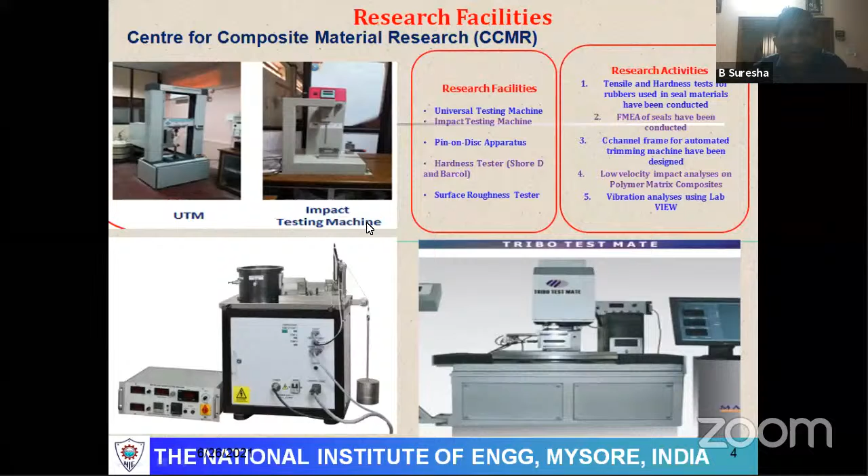So what I did was survey where these facilities are available, and also met professors at IISc and also IIT Chennai, and to some extent IIT Delhi, where leading researchers worked for more than a decade in the area of tribology. One is Madam Jayashree Bijwe from IIT Delhi, and then in Central Power Research, Dr. Sitaramu and also Sampathkumaran, and from Indian Institute of Science, Surappa, and also Professor Kishore. They are into polymer based composites. Maybe because of those contacts, and also going through what facilities they had available.

When I took up my coursework at PSG College of Technology, I thought I should contribute more towards the research society, so that it is beneficial not only for researchers but also for the students of the National Institute of Engineering. During the coursework, I wrote a project for DRDO, that is the Aeronautics ARDB project.

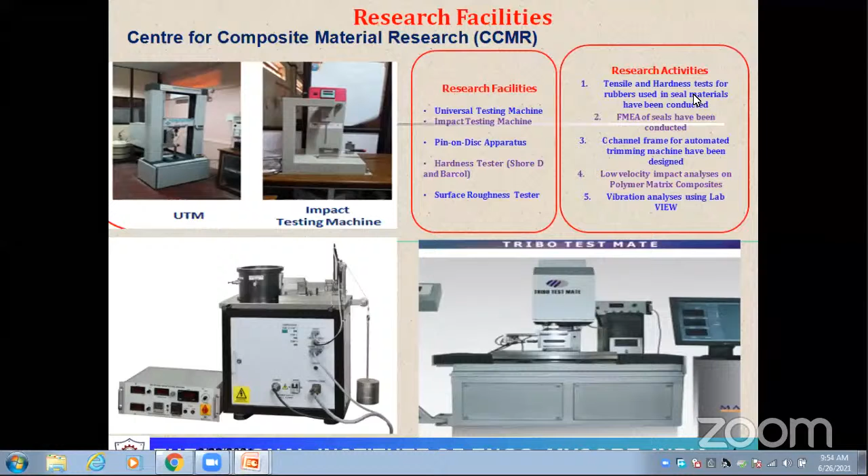Instead of dry silica sand, which is made to flow through gravity using a hopper so you can control the flow of abrasives per minute, the same abrasive particles of different size can be made into a slurry with water, and that wet type abrasion test can also be carried out. Similarly, for erosion, instead of dry sand, you can make use of slurry erosion testing, wherein slurry is used as abrasive.

Coming to two-body abrasion, any abrasive wear can be classified into two types: two-body abrasion and three-body abrasion. Usually two-body abrasion occurs in material removal from a cutting tool for bar stock, using a lathe for example. Whereas for bearings, you have a sleeve, around that you have lubricant, and then a rotating member made of very high strength material, steel.

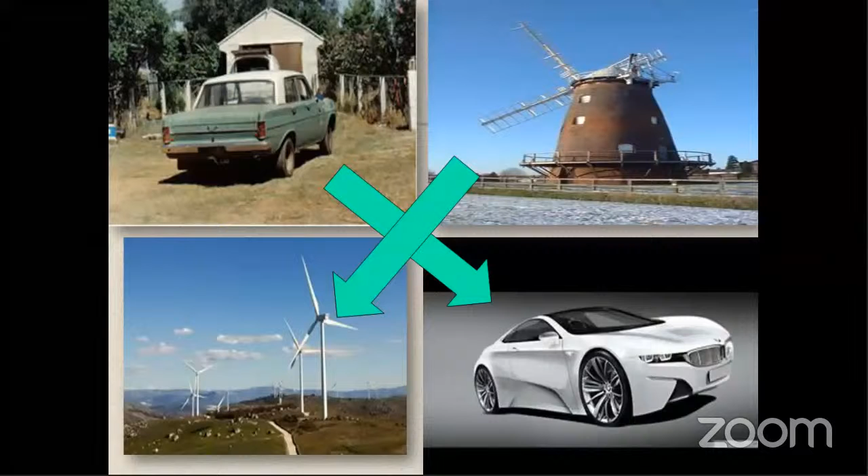So coming to this slide, why I showed these images here is you can understand a lot from these four figures. If you look at old technology or the development of materials in almost the 20th century, you can see these transportation or automotive vehicles, and the whole structure or assembly of a four-wheeler. From that photograph you can understand the performance, the materials used for the assembly, and also the aesthetic aspects.

In addition, the corrosion aspects of these conventional materials, and also the total weight. Because of material science advancement, and whatever technology we have today for fabrication of not only conventional materials but also man-made materials, and the usage of computers or software,

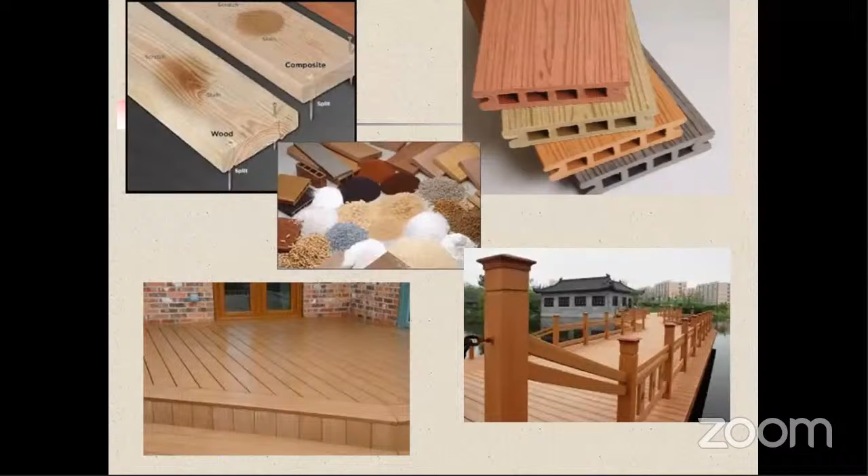So why only in transportation or in the power sector? Why not even in structural applications also? You can think of using what are called waste materials. Whenever you go for cutting different woods, you will have a lot of waste. Why can't you make use of that sawdust and develop the waste materials into products for various

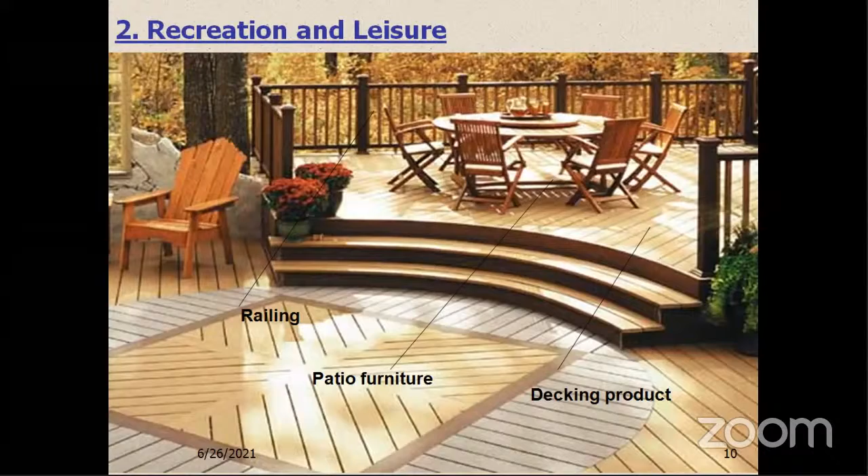And one more utilization of this waste is given in this figure. And also some of the sandwich composites and waste materials, wherein you can access insulated materials. Nowadays a lot of research is going on related to soundproofing, especially in auditoriums, using man-made materials, wherein you utilize natural fiber with very lightweight and foam type structures for roof soundproofing applications.

So the benefit of composites is not in one direction or for a particular application, it is multi-directional. If you make use of polymer-based composites, you need not go for painting of those parts. You can think of a natural colorant, and during fabrication itself you can add those pigments and develop the products. And the density is very, very low.

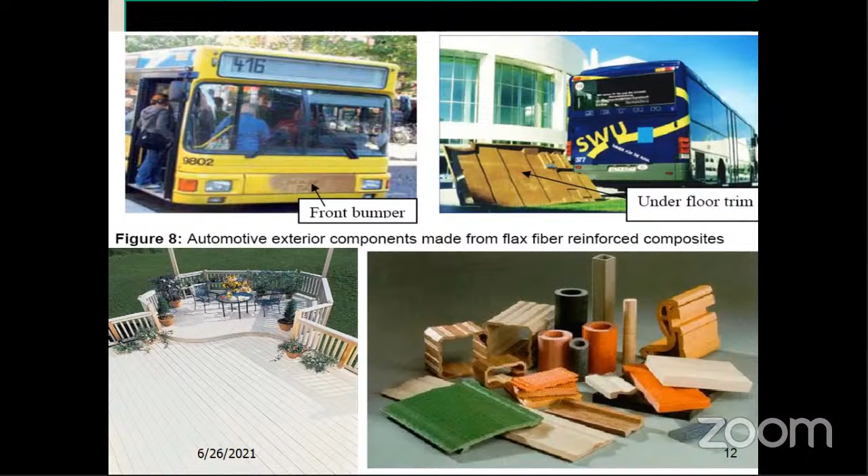Because of that, the performance of the composite compared to any conventional, high density material is better; here the benefit is a very high strength to weight ratio. That is an added advantage when you think of polymer and lightweight metal based composites for end applications. Some more applications of composites are shown in this figure.

So not only in those fields, but using natural fiber reinforced composites, the post office box, helmets and roofing of parking areas, where economically you can build structures using these waste materials converted into composites, and lightweight also.

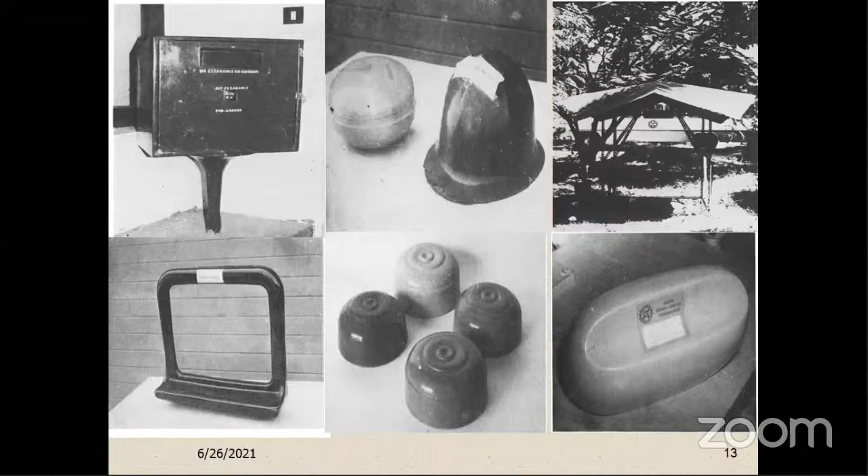Even automotive applications, in transport vehicles or even in chairs and other moving equipment, you can think of these polymer based or polymer filled with metals for bearings, rollers, etc. We can already effectively utilize these composites for these applications.

Because of industry 4.0, if you look at that framework, we have digitized technology, digital printing, or 3D printing of both polymer based composites as well as metal based materials. Because of the technology we have today, with minimum waste you can develop these materials to very high accuracy and good surface finish.

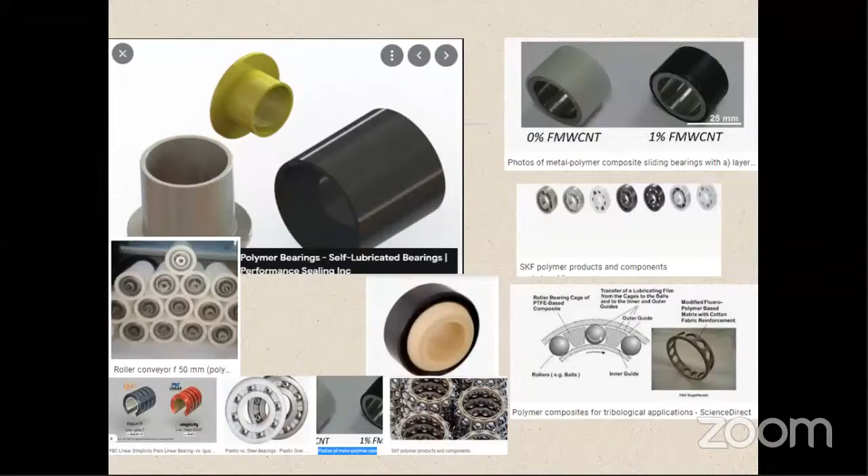Some more figures, this polymer bearing technology from SKF. These are ball bearings, single row or double row. Except the balls, rollers or needles, almost all other parts of the anti-friction bearings, the inner race, outer race, and cage, are made of polymeric composites rather than conventional material.

Because of this advancement, performance-wise it is far better than the earlier bearings we used for various applications, and also has long life.

So those are all the advantages. And when you make use of these polymers as one of the ingredients to develop products, the best advantage you have is, one, it is lightweight. In addition, it is corrosion resistant. And further, when you think of this reduction of coefficient of friction, that is very much essential so that you can reduce power loss due to friction in various machinery.

So in that direction, the polymer is the best material, wherein it acts as a continuous phase in the composite. So polytetrafluoroethylene, polyether ether ketone, epoxy, and also polyester, etc. are effectively used in the development of bearing products so that you can reduce friction and also increase the wear resistance. Those are the benefits.

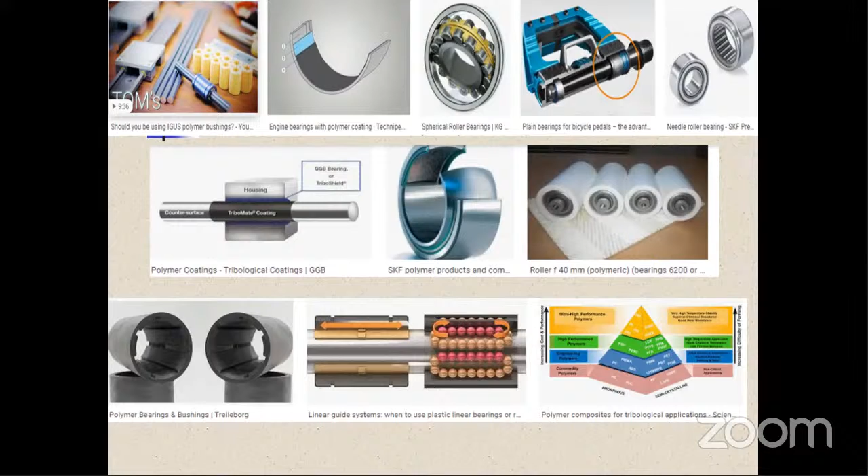And because of these newer advanced materials for the development of bearings, you can think of the cost reduction in these products because of large usage, as you can see in the present scenario. So some more components wherein polymeric materials with various strengthening materials or agents are used to develop the composite materials. So some more figures: it is a needle bearing,

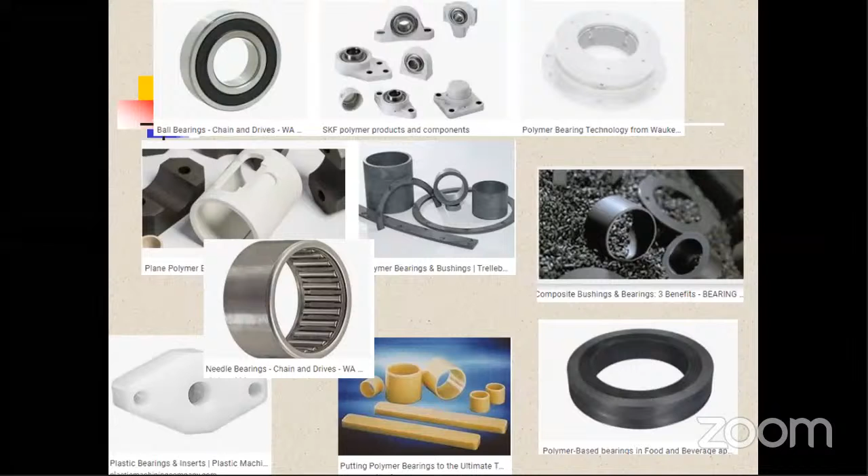and some figures here, sleeves, and also what are called the washers, or sealing parts. And also you can see some cylindrical sleeve with contours and other things, without much wastage, thanks to this advanced manufacturing technology we have. So with minimum waste you can produce the final product in one shot. No secondary machining operations are involved when you go for development of these complicated shapes.

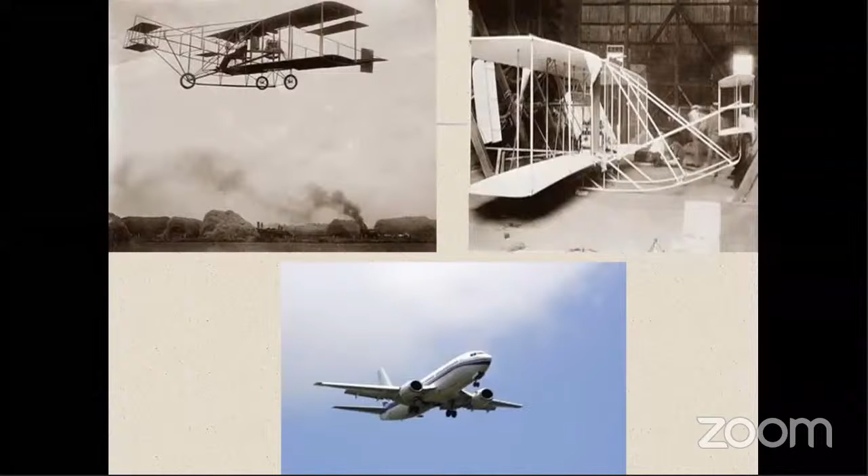So knowing those various applications of these newer materials because of the newer manufacturing methods, I will just go through this overview of what a composite material is. If you refer to the examples I showed, many engineering applications require unusual combinations of properties. Those properties you cannot get by selecting a conventional material. For example, in aerospace, underwater, or even transportation, you cannot achieve it with a single material, because any aerospace component should be very strong, stiff, lightweight, and also abrasion resistant.

But when you think of a material that is very strong and stiff, such materials are available with higher density, and also the space occupied is more. So you can think of some conventional materials. But if you go by lightweight materials and improve the properties so that they are man-made and also abrasion resistant, those are materials which are not readily available as single or homogeneous materials. So in those situations, you need to go for the development of newer materials, what we call man-made materials, or simply a composite material.

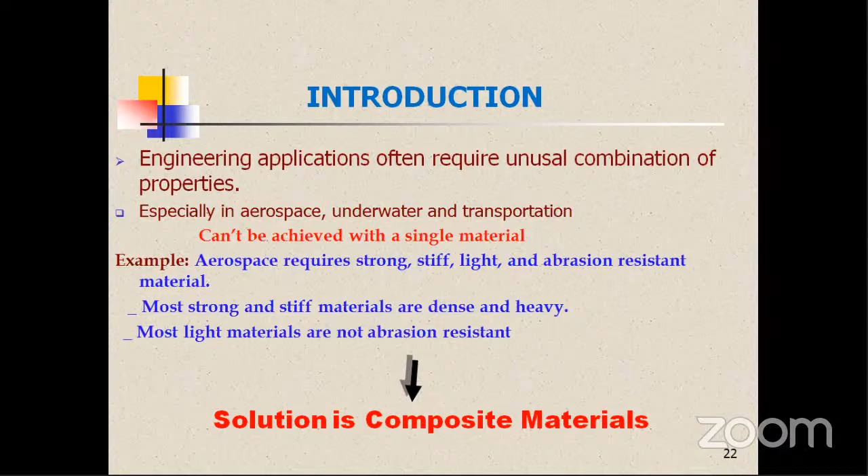So just for a layman, you can understand how composites can be fabricated. Here you can see I have this mat type structure, the carbon fiber fabric. So these fabrics of different layers, depending on how much thickness you need, with epoxy and hardener, you can lay up and produce carbon fiber reinforced epoxy composites. In composite terminology we call them laminates. So depending on the orientation of the fibers, you can think of how the directional properties can be improved.

So nowadays we have smart materials, then we have functionally graded materials, because of these ingredients and also different materials available with various fabrication facilities. It is possible to go for effective design and fabrication so that minimum material waste is taken care of by using these various materials available in nature or even in the developed form.

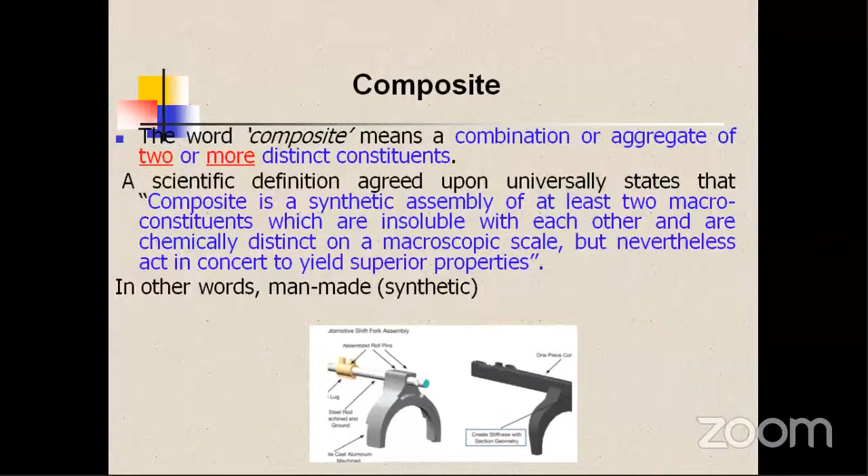So in this direction, when you go for more than two constituents to develop a composite, you can call that composite an advanced composite, or a multi-phase composite or hybrid composite. So with that, I have already given what is matrix and what is reinforcement. The matrix holds them in place. That is why it should be continuous, with the discontinuous phase being the reinforcement.

So the majority of thermoplastic materials are available in granule form, and you know the fundamental difference between thermoset and thermoplastic. So you need some device to heat these granules so that they will be in a melt state. In that stage, you have to add reinforcement and mix very well so that dispersion is more uniform. That discontinuous phase may be fibers or fillers, and finally you can make use of molds similar to hot chamber die casting or cold chamber die casting to produce various parts.

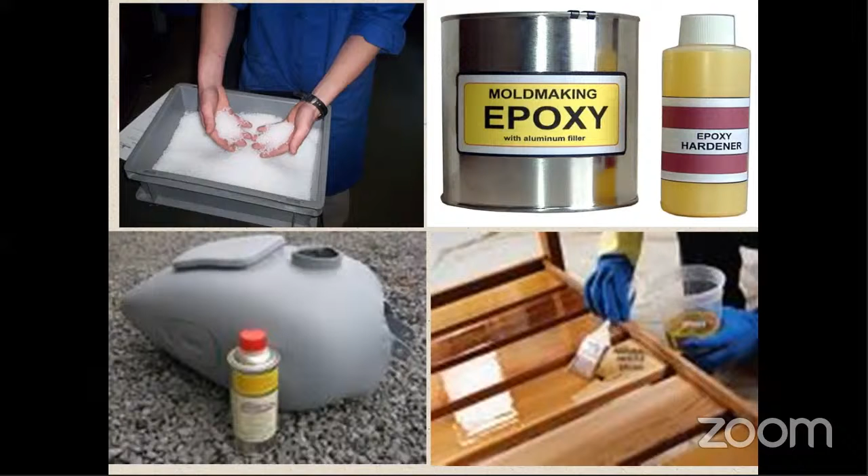Whereas that is not so in the case of thermoset composites. As I said, polymerization is required for thermoset materials like epoxy, vinyl ester, or polyester. So if you make a little effort with some basic textbooks, you can easily go for development of either thermoplastic or thermoset based composites.

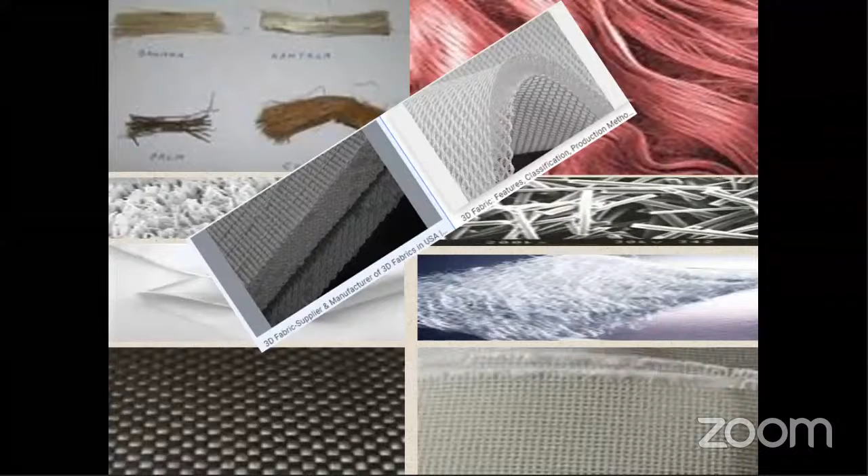So there are various fibers, starting from natural fibers up to synthetic fibers. Nowadays, in some applications where you need to strengthen the materials in the Z direction rather than X and Y, instead of selecting 2D fabric, you can also think of 3D fabric, three-dimensional fabric, as effective reinforcement to develop various composites.

So why only synthetic fibers? You can think of this coconut tree. You take any part of it, it has what is called cellulosic material, what we call natural fibers. Why can't you make use of this readily available material? Some surface treatment is required so that you remove unwanted material like pectin from the fibrous material, and make use of these bio-friendly materials as effective reinforcement to produce biocomposites for various applications.

So a lot of research work is also going on with respect to this, in Brazil and also Malaysia. These countries are thinking of replacing almost all synthetic composites with bio-based composites, and they are even encouraging farmers to grow fibrous plants or trees, and the government is supporting farmers to grow these naturally available trees or plants, and finally make use of those fibrous materials for development of products for various applications, especially for transport.

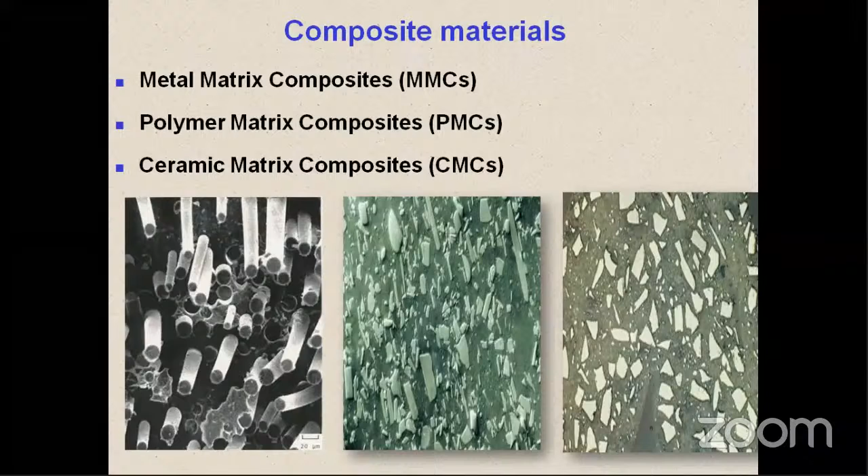TEM especially is very costly, so it is usually a facility for characterization of nanomaterials rather than micro composites. As I said, in some cases, as a designer, you have already selected materials, but sometimes you will end up with a bonding or adhesion problem with the other constituents during fabrication. In such cases, you can think of additives like plasticizers, fillers, stabilizers, flame retardants, coolants, colorants, pigments, etc. to modify the properties of either the matrix material or the reinforcement material.

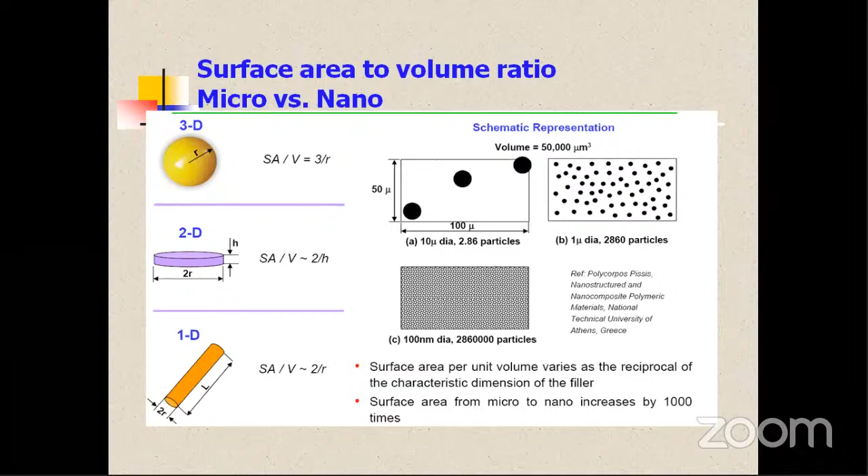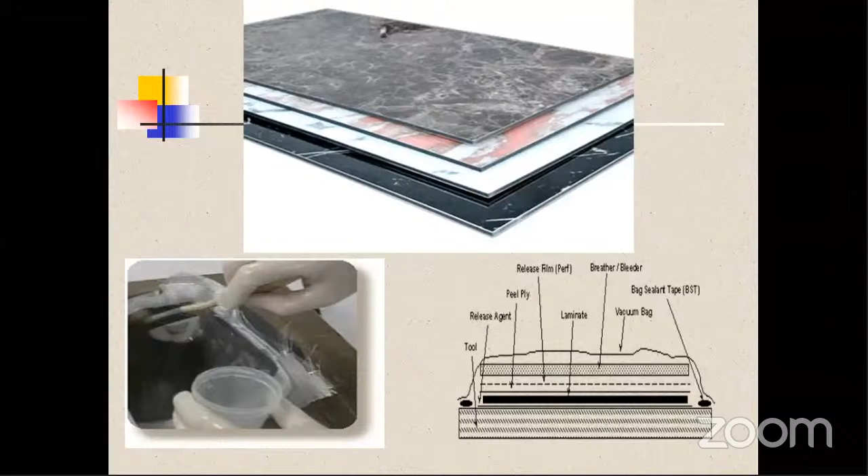Then coming to polymer matrix composites, you can think of thermoset or thermoplastic polymers, with majority synthetic polymers, carbon fiber, glass fiber, aramid fiber, basalt fiber, boron fiber, etc.

What are the benefits instead of metals or ceramics as the base material or continuous material? If you select a polymer as the matrix with various organic or inorganic fillers, in fiber form or particulate form, benefits include high strength to weight ratio, lightweight, fire resistance, good electrical and chemical properties, weathering resistance, and color - any pigment can be used to get natural colors.

Maybe because of this, in wood-based composites, you can see even teak structure can be obtained from man-made doors or frames, even window frames, etc. That is the technology available today.

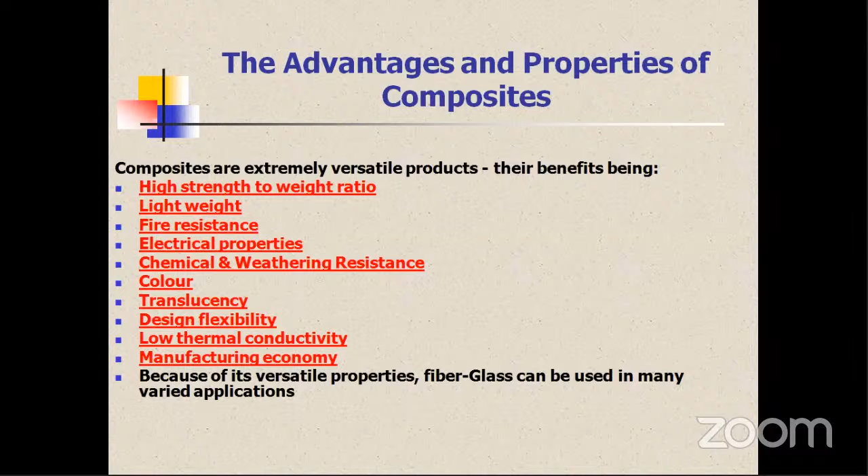Translucency, design flexibility, thermal conductivity is low for these components, then manufacturing economy - if you go for mass production, you definitely lower the cost for the product you develop. So when you think of development of polymeric composites, it is for enhancement of mechanical properties.

You should be very careful about what design considerations to account for when selecting fibrous reinforcement. First, you should know the type of fiber reinforcement, whether carbon fiber or glass fiber, and what percentage or volume of fiber. That is very important - you cannot go for 100%.

It should be, as I said earlier, 60% maybe maximum if you use hand layup, or you can think of pultrusion or filament winding, where up to 80% fiber you can impregnate with the polymer for development of the products.

As I suggested in classical lamination theory, for the laminates you develop, especially fabric reinforced composites, orientation of fiber is very important. You can orient all fibers in the X direction or Y direction, or orient from 0 to 90 or 90 to 0, that combination.

And what type of resin - is it having good inherent properties, an effective matrix material for the reinforcement you selected? You should not unnecessarily make use of very high strength material if the design requirements don't need it. So you should think of the type of fiber and type of resin so you can have control over the cost of the product you develop.

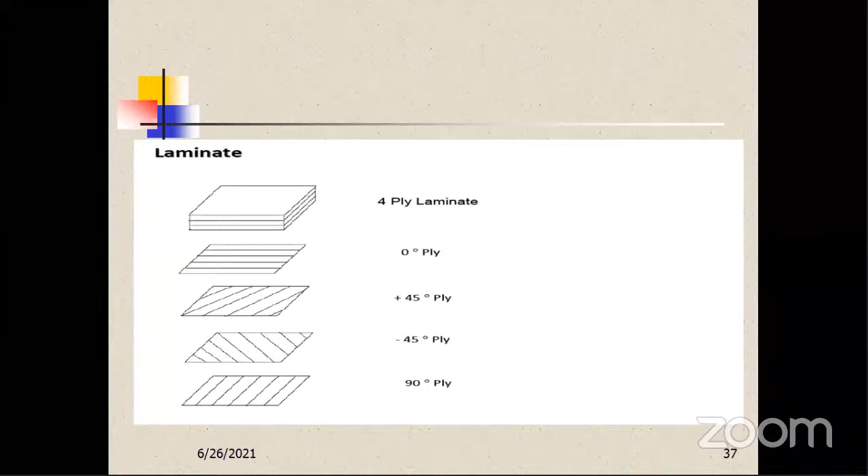As I said, in classical lamination theory, orientation of each fiber is very important, as shown in the schematic diagram with different layers. So in a composite, based on the bending properties required for the laminate, you can think of various architectures of fibers, so the stacking sequence differs.

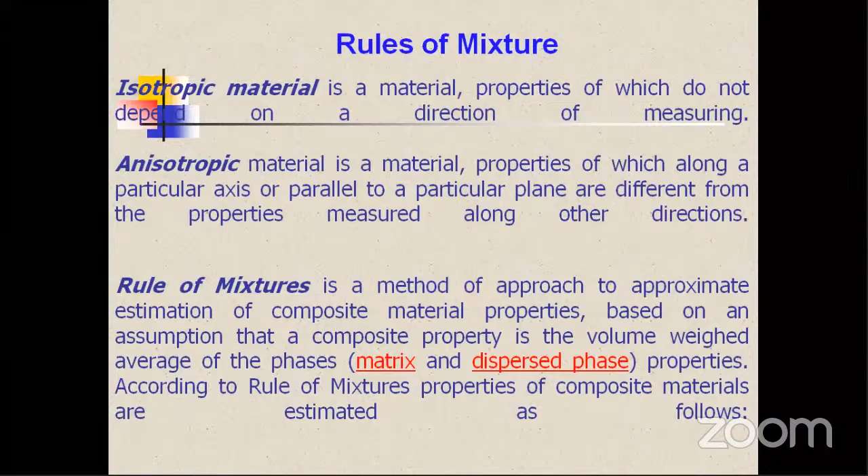You can estimate the development of composites before going for fabrication. Any composite materials chapter will give the rule of mixture, so that you can study ideal properties of the reinforcement and matrix selected. You can estimate strength, density, thermal properties, and electrical properties, based on models developed by different researchers.

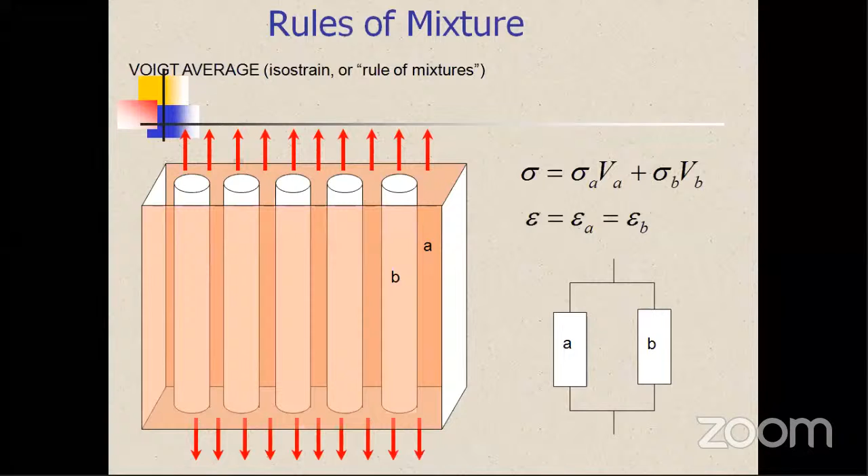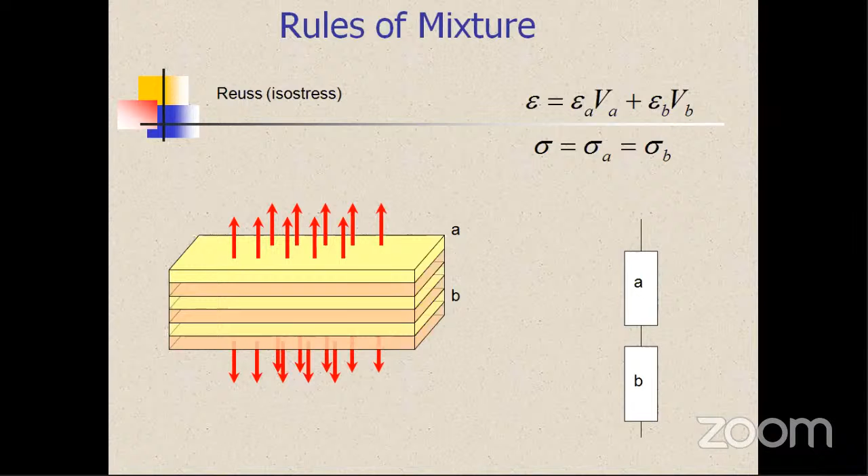Depending on fiber orientation, the stress induced and strain can be the same, or in another model, stress is constant and strain is varying, depending on whether fiber orientation is in the x or y direction and loading differs. This is the difference between the Reuss model and the Voigt model, and how modulus varies with weight percentage of reinforcement.

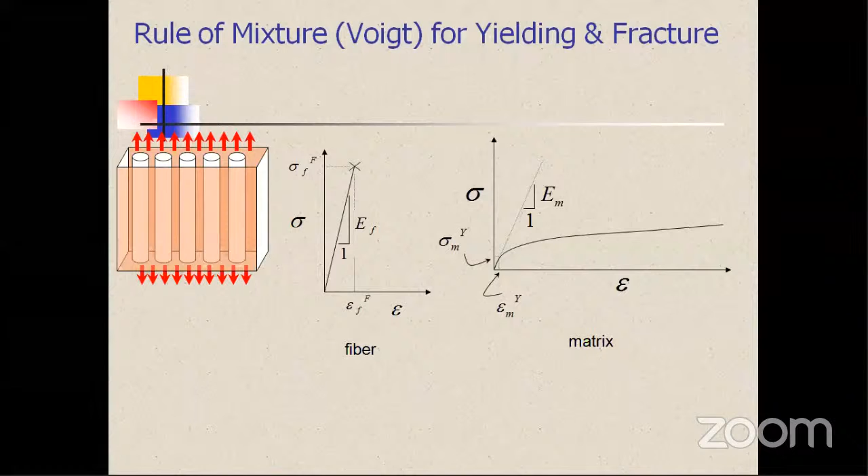For the matrix and reinforcement materials, the reinforcement generally has very high strength but lower strain, whereas epoxy or any matrix material has better ductility rather than strength. Superimposing these gives combined properties, since it is not a homogeneous material but a heterogeneous one.

Other properties like shear modulus, Poisson's ratio, and thermal expansion can also be modeled and estimated. Only after that should you go for procurement of materials from the best suppliers, because in the market people may cheat when money is involved. So make a thorough survey to get good confidence for the development of research work.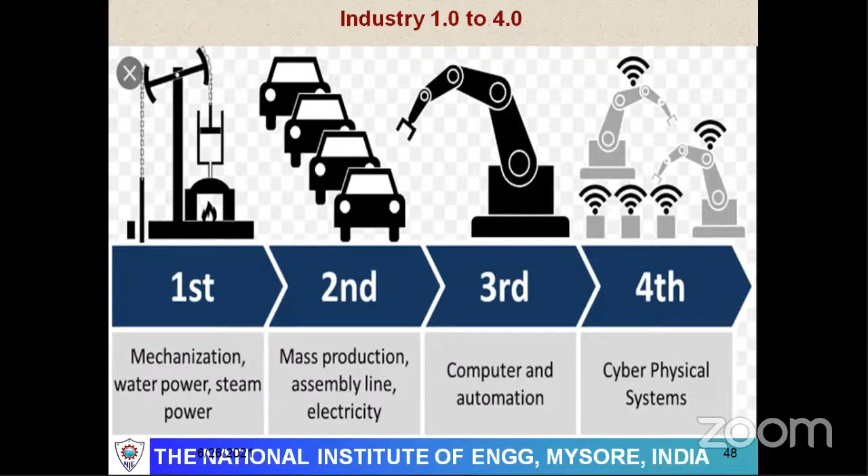Now we have cyber-physical systems, where this framework consists of the Internet of Things, smart sensors, advanced robots, and big data analytics. Among these, 3D printing is a very important technology for manufacturing. If we use 3D printing, also called rapid prototyping or 3D additive manufacturing, for the development of composites—especially polymer composites—we can study how those polymer composites perform, which I will go through from these slides onward.

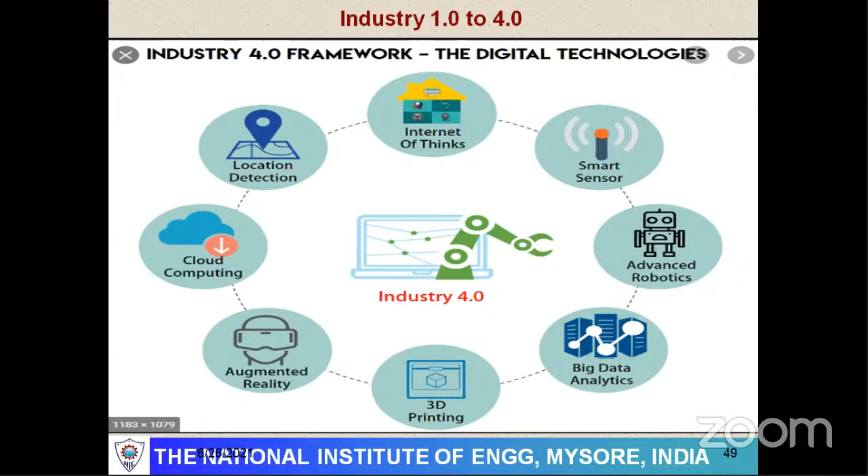Some complicated components made of polymeric-based composites are developed using 3D printing. Even a multi-cylinder block for automotive vehicles can be produced in one shot using a CAD model with an STL file, reproduced using selected raw materials with a proper 3D printer.

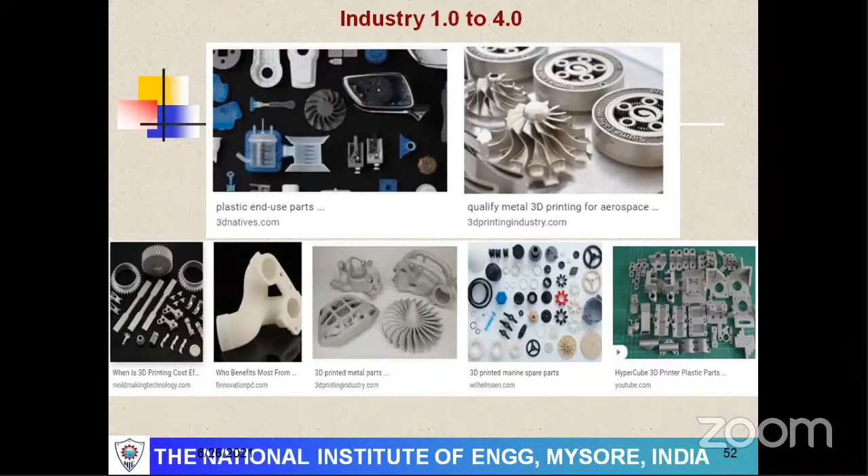Given the technology available today, why not make use of this advanced technology for mass production, so the cost per product can be reduced? Some components that are very thin and also very complex can easily be produced by means of 3D printing.

So what are the benefits of 3D printing? It enables cheap manufacturing through mass production, quick production, less waste, accessibility, sustainability, and new shapes and structures. These are the benefits of 3D printing.

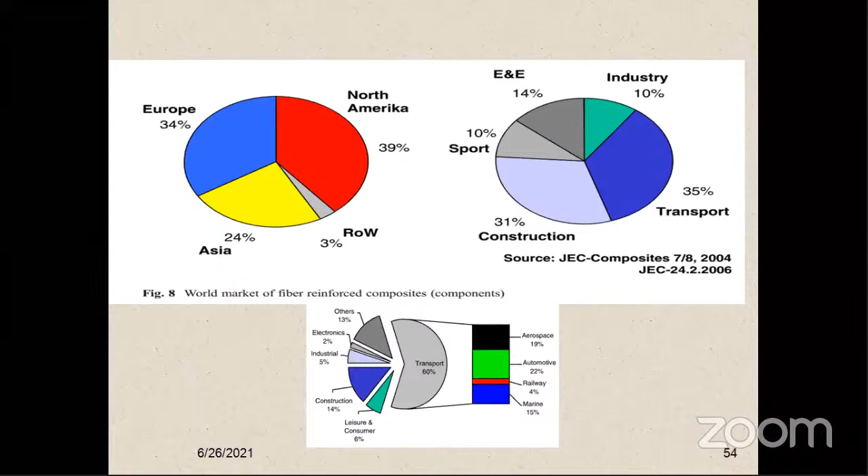Coming to 3D printing applications in various sectors, I will not go through these in depth. The usage of composites with 3D printing worldwide: one company called JEC Composite develops components for transport at 35%, industry at 10%, electrical and electronics at 14%, sporting goods at 10%, and the major share goes to construction-related industries at 31%. This is where composites can be manufactured.

I will not go through this in detail, but the methods include sheet molding, injection molding, resin transfer molding, pre-preg, pultrusion, filament winding, and thermal forming.

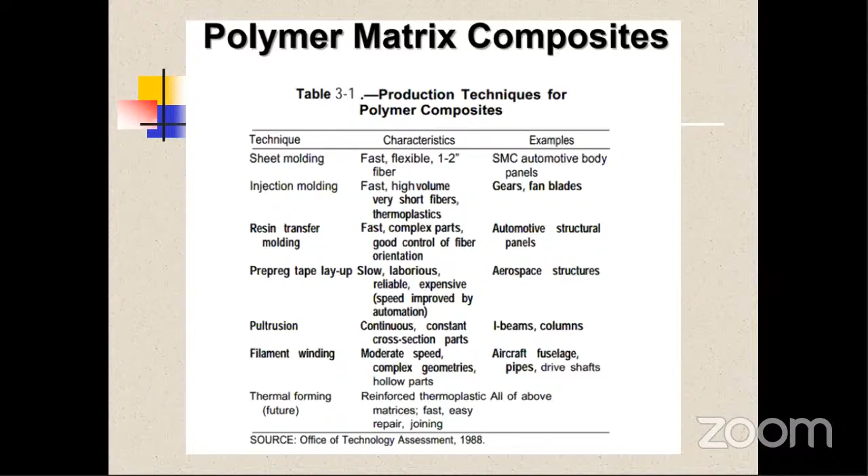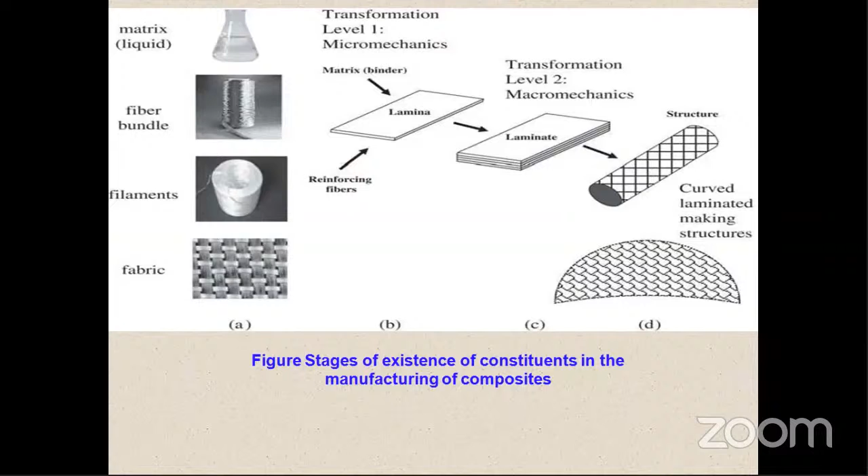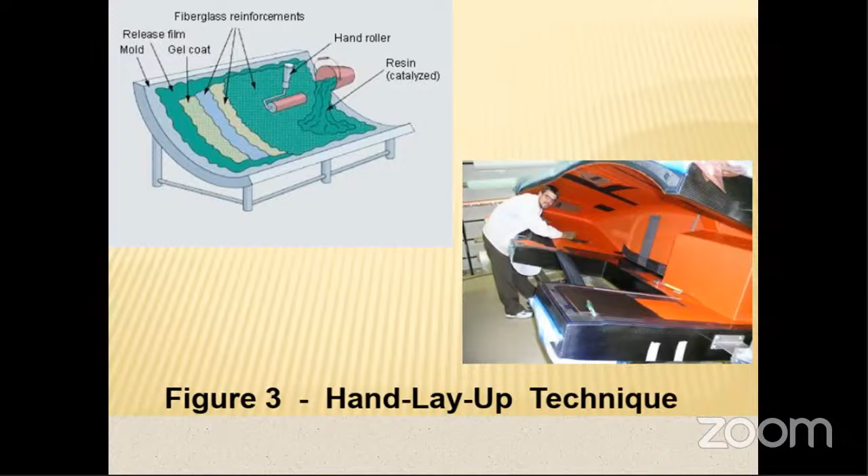Coming to the simple hand layup technique, this is more useful for researchers. Hand layup for a product, how you can take it up with the mold available.

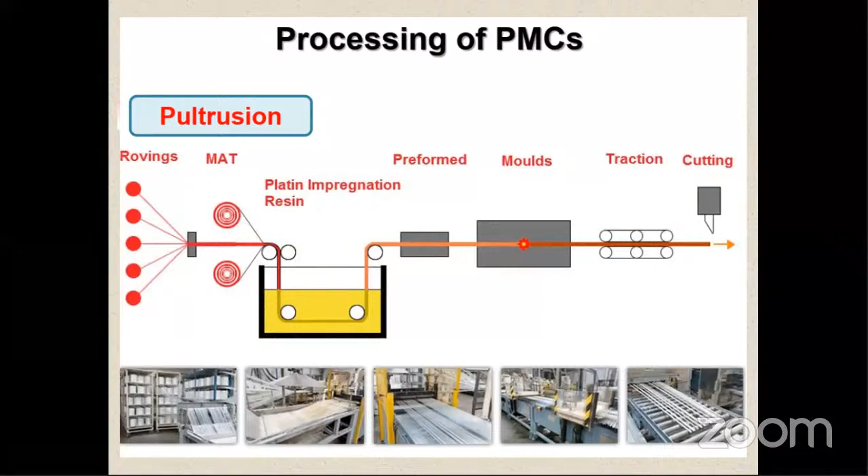Some of the figures are shown here, and various complicated sections of different types can be produced using this pultrusion technique. Then you have this, what is called resin transfer molding.

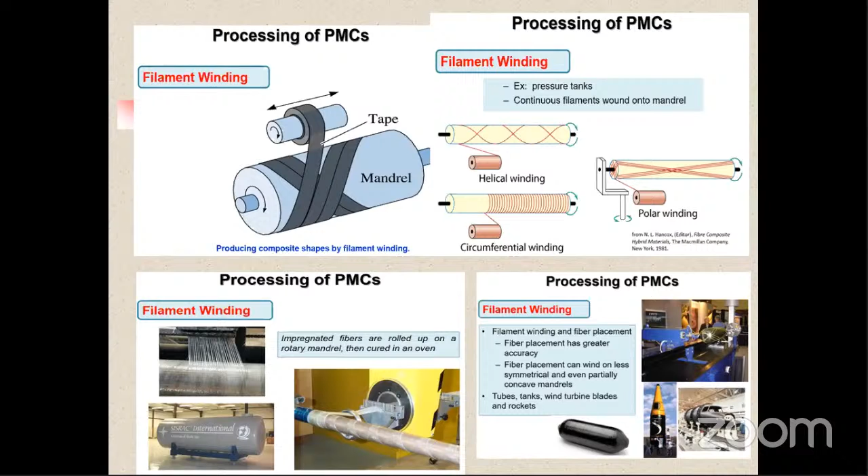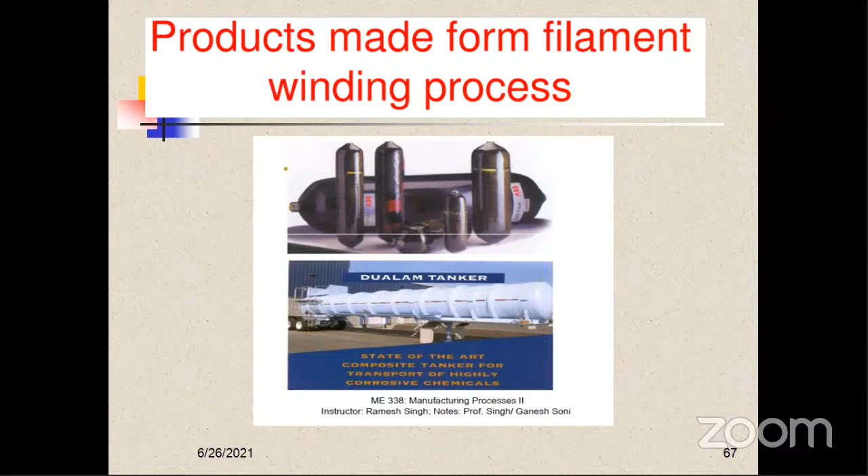Then for almost cylindrical or pressure vessels, you can think of these hollow sections using the filament winding method. Some of the products manufactured using filament winding include the state-of-the-art composite tanker for transport of highly corrosive chemicals, which are shown here.

This work is our joint work with a university from the USA - North Carolina University, with Kunigal Shivakumar, who is heading the Center for Composite Material Division, where we use what is called spinning of fibers.

That means polyamide spun at nano level, and those nano fabrics were layered between carbon with epoxy, developing a composite for studying friction as well as wear of these composites for some end applications - properties like damage tolerance, impact behavior, temperature resistance, and electrical resistance.

Wherein what should be the proportion of matrix and also fibers - maybe you can understand this from this slide.

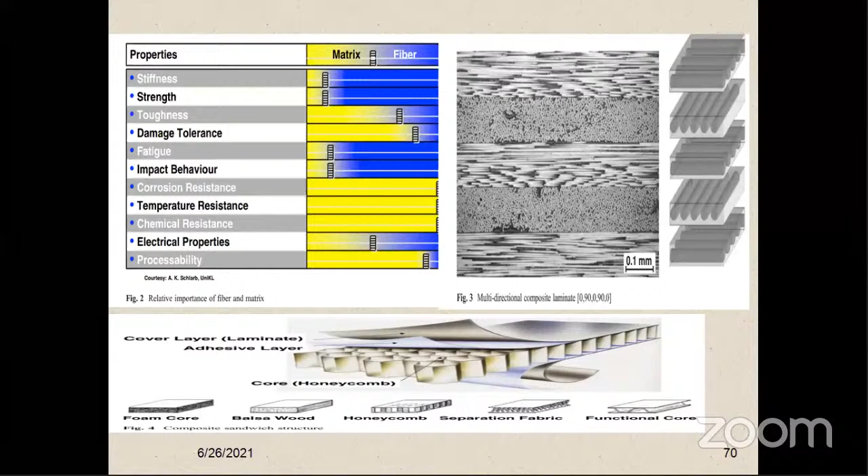Coming to 3D printing, already I told you it has so many advantages, and it is an additive manufacturing process that creates three-dimensional objects from three-dimensional digital information.

So these three-dimensional digital models are sliced into a number of layers, into many two-dimensional cross sections that are then printed one on top of the other. Maybe if you look at this, it is similar to our simple hand lay-up technique.

To understand this printing technology better, I have taken one three-dimensional component where you have a number of slices, and later those slices are formed with ingredients - polymer with filler or fiber - using what is called a 3D printer, layer by layer.

It is shown from this: you have a model, slice it, then print it. So how easy it is to manufacture final products of any complicated shape using a 3D printer can be visualized from this slide.

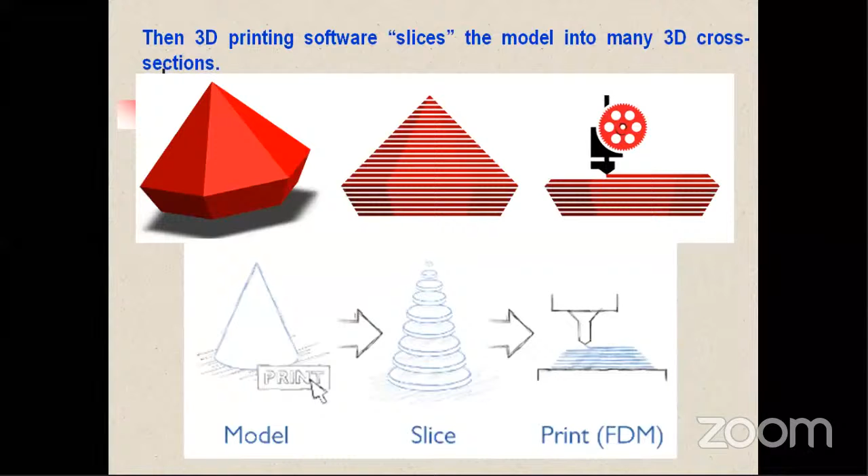Look at this one more component, and how those different slices were made in a CAD model and later fed through the system, and then finally produce this component.

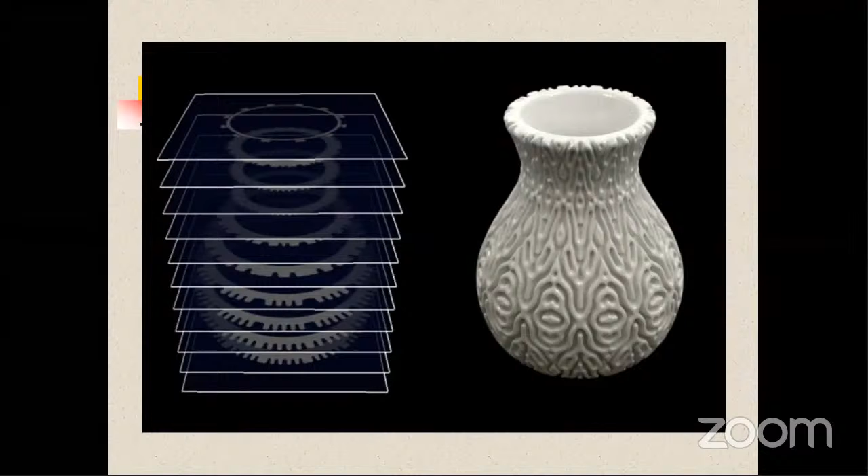Look at this - the aesthetic aspects and also the outer surface with so many cavities and other features. You can develop this model or product with almost zero defects by using what we call 3D printing.

Controlling the quality of the product depends on whether you go by orientation of printing in the X direction, Y direction, or Z direction. The properties also differ, and from an optimization point of view, you have to decide whether to print in the X, Y, or Z direction, depending upon the material combination selected for the development of a product.

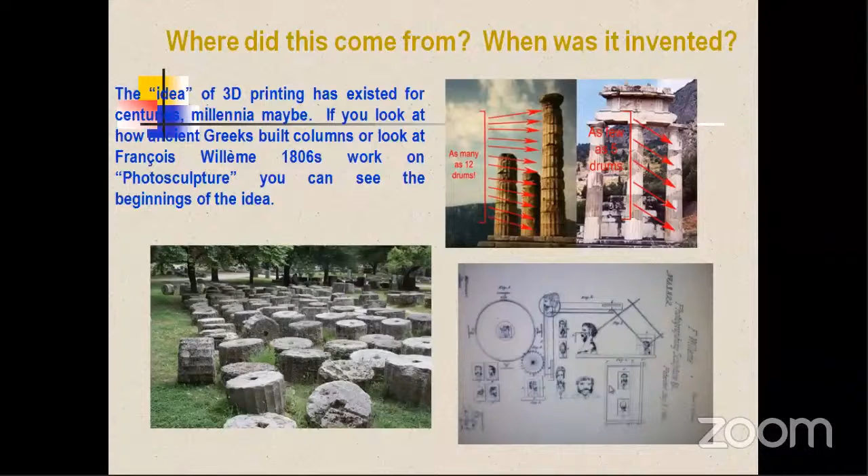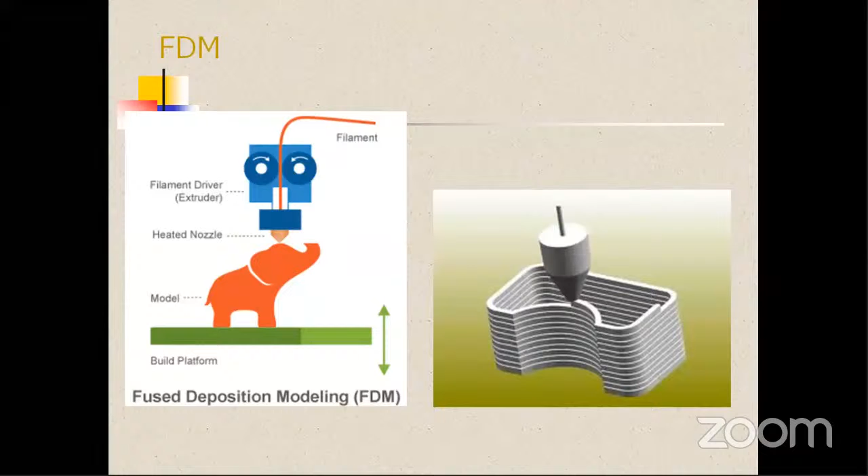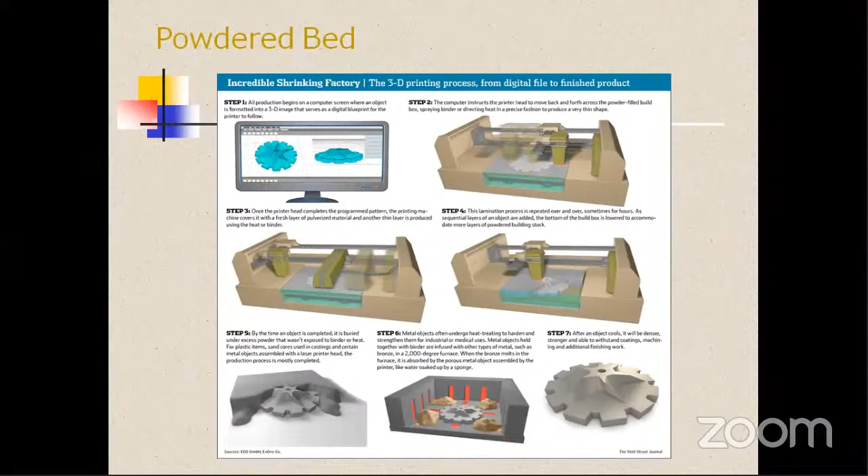So then so many printing parameters and technologies or fundamentals are involved. So try to understand those fundamentals and go for this, whether you have to go by fused deposition modeling or fused filament printing or powder bed methods, etc. So this is depending upon fused deposition modeling, how that product is finally developed using a 3D printer. So one more line diagram of this FDM is shown here for your reference. In powder bed, how those parts are manufactured is also given.

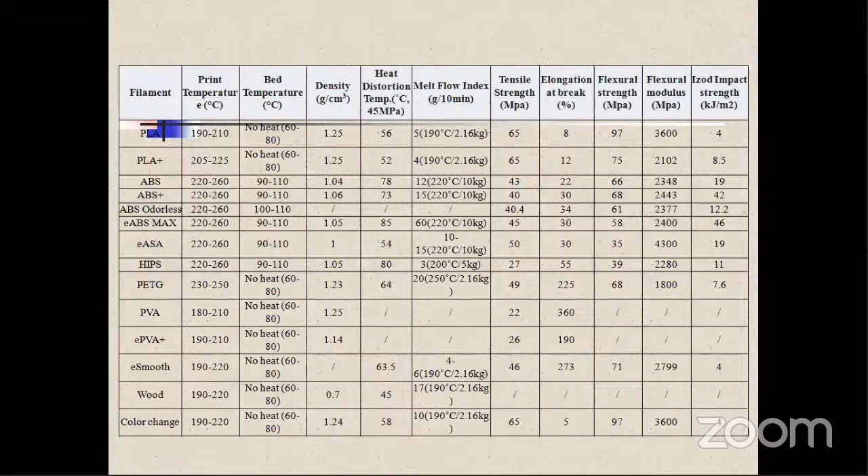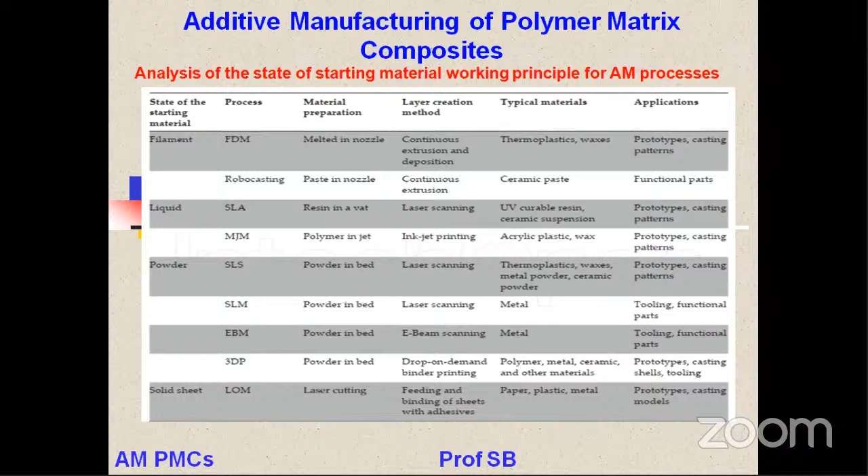Then some of the composites were 3D printed and their properties are shown here for your reference. And some more methods of manufacturing using 3D printing, and for what applications and what combination of materials you can select which type of method, state of the starting material with what process, whether it is FDM or robocasting or SLA or SLS, etc. So coming to mechanical properties, maybe because of time I will not go through.

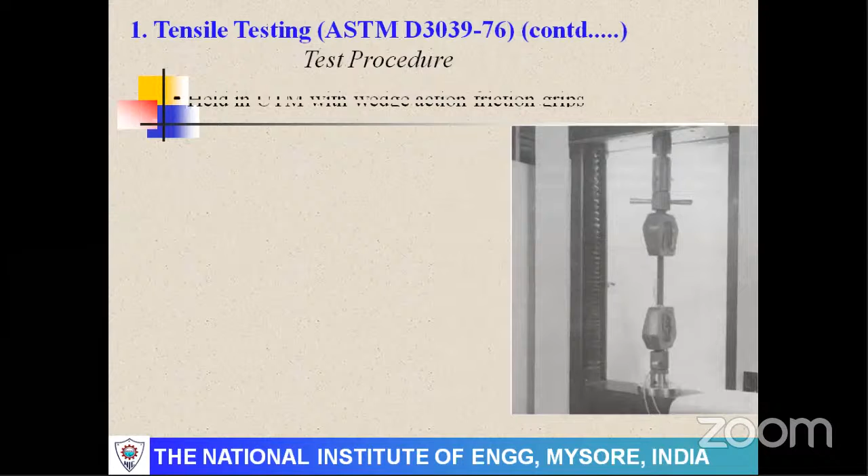So as per ASTM D3039, this is the equipment you can use. Alignment of the sample should be in the unidirection. Then how those tests are conducted, so that you will come to know the stress versus strain. Then the failures, fractography you can analyze. And then coming to flexural testing, that is the 3-point bend test and also the short beam test for evaluation of interlaminar shear strength. So you can go through ASTM D790.

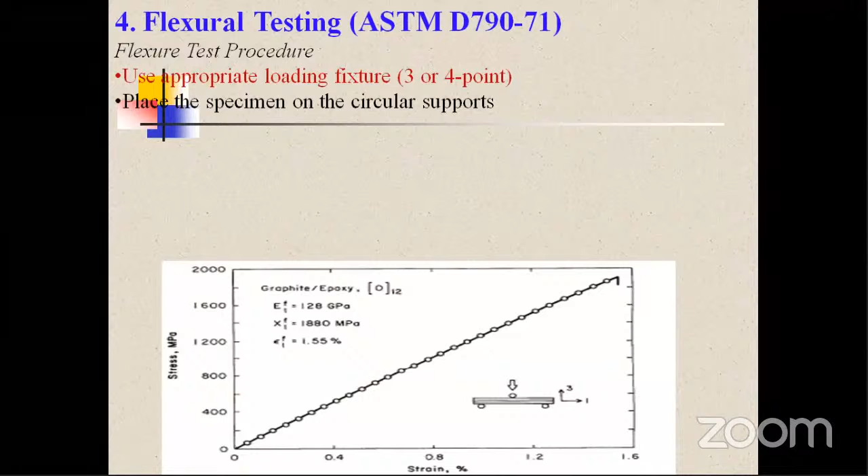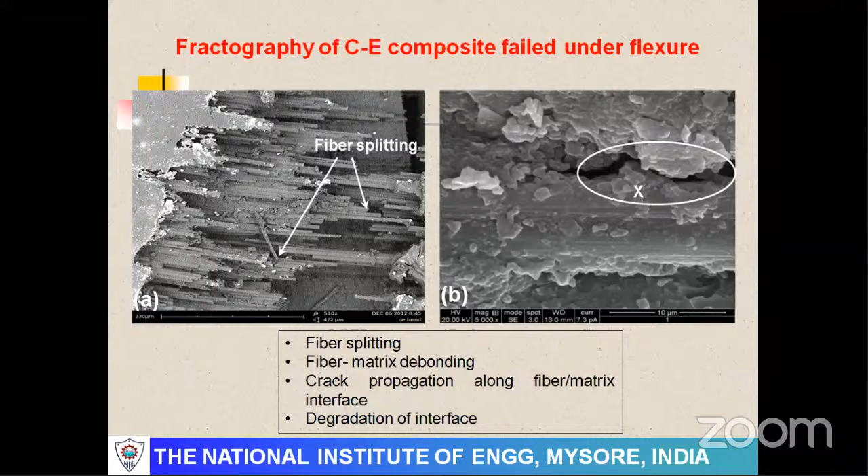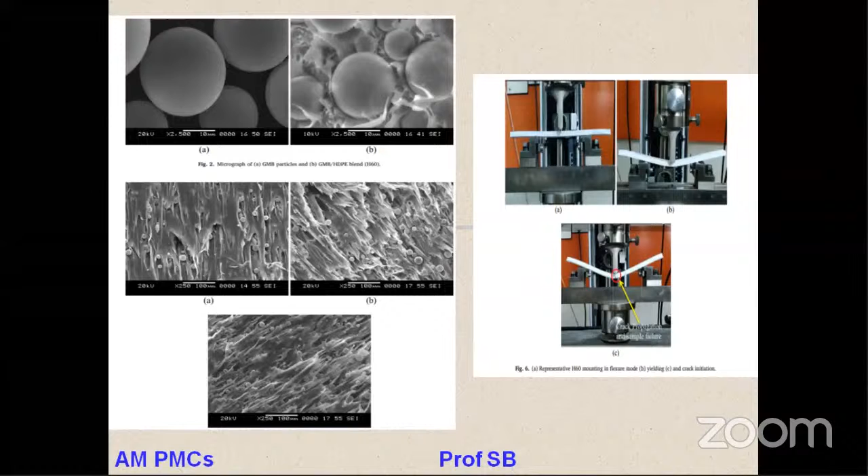So some more details are given here, and this fly ash or cenosphere with high density polyethylene, where one work is from Doddamani from NIT Surathkal. He did this work and I took it from his paper, and he went through the 3-point bend test and gave a lot of inputs and also fractography related to HDPE based fly ash cenosphere samples, or even glass beads he also took, and published a number of papers. So some of the commercially available 3D printers are given for your reference.

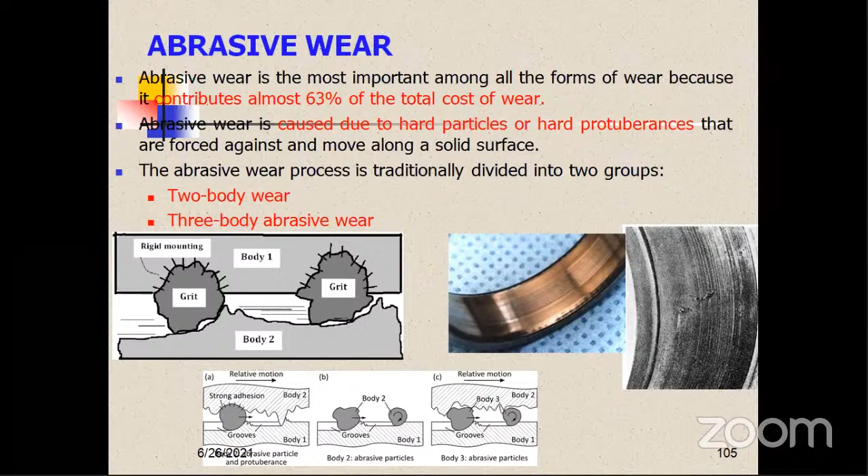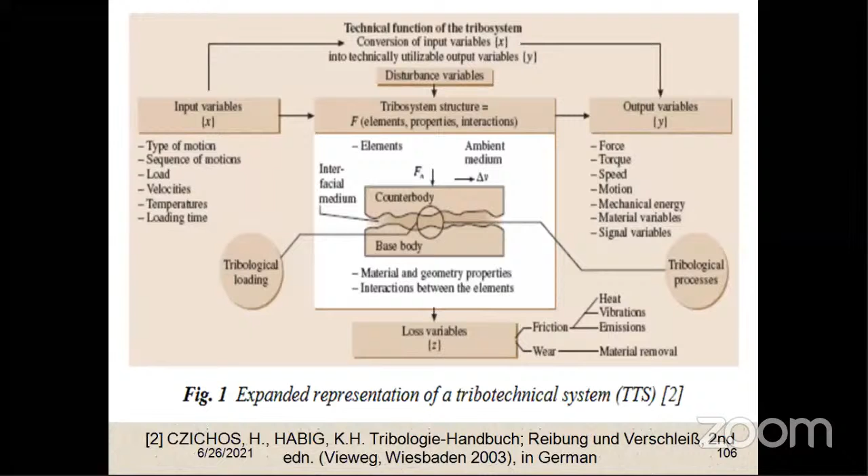And for a tribosystem with so many parameters, like input variables, disturbance variables, then output variables, how complex the system characterization is can be visualized on this slide. The mechanisms involved are given here.

Then when a hard particle like an abrasive, like silicon carbide, moves with some velocity and applied load, how material is removed from the bearing is given here. What is the type of mechanism involved? Is it cutting or fracture or fatigue by repeated ploughing, or grain pull-out? All those things can be studied using the scanning electron microscope for the worn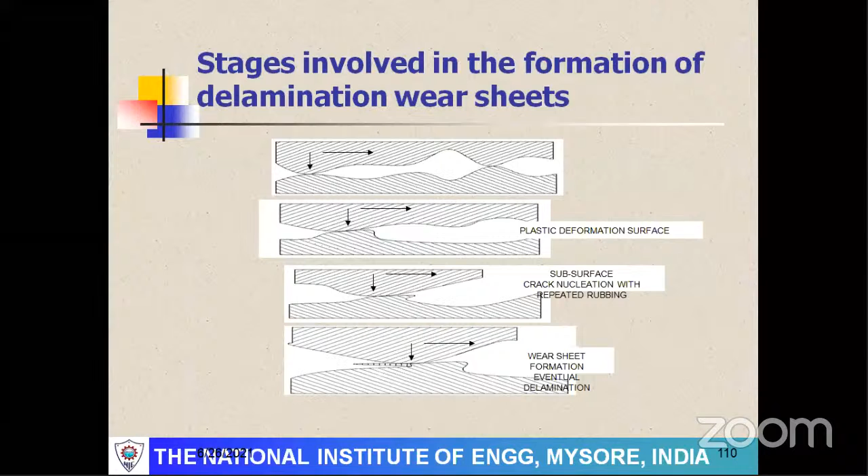surface features. So the wear mechanism, when two bodies are in contact with moving velocity and applied load, how that material in the form of very fine debris gets removed, can be visualized from this schematic diagram. So what factors should you account for when you go for wear resistant components? Design criteria, that is transmission of load, type of motion, degree of lubrication, temperature as well as environment; then operating conditions, speed, contact area, pressure, abrasive characteristics; material properties, hardness, microstructure, work hardening ability and resistance to corrosion. So the choice of material selection is given in this.

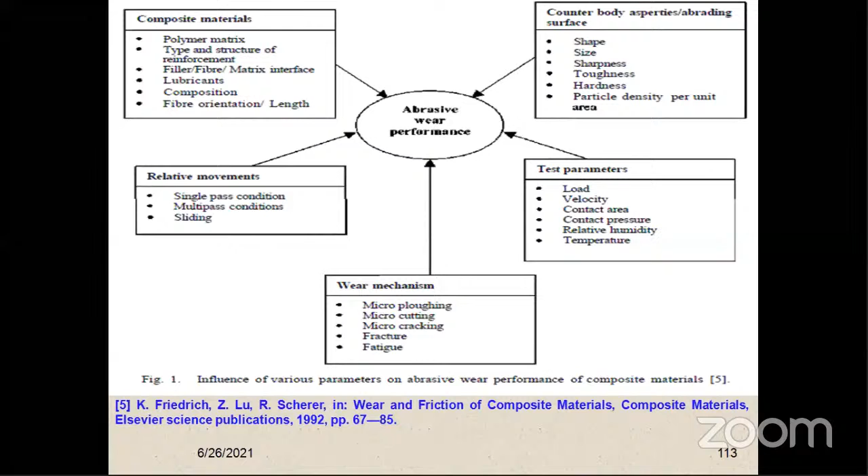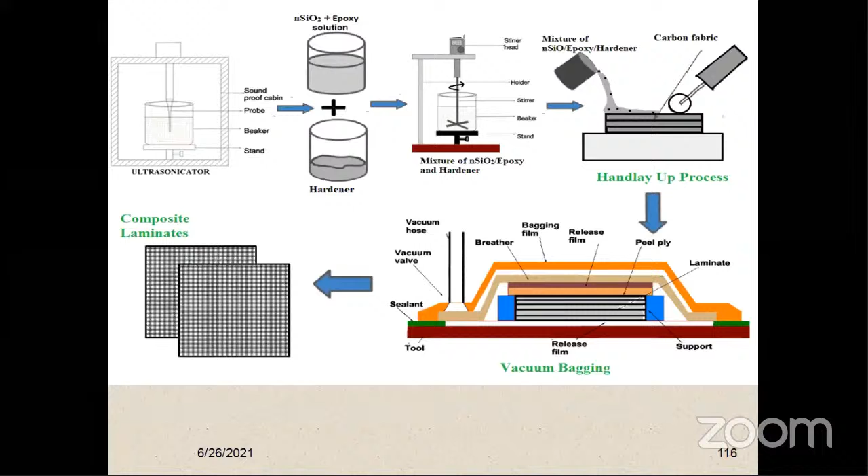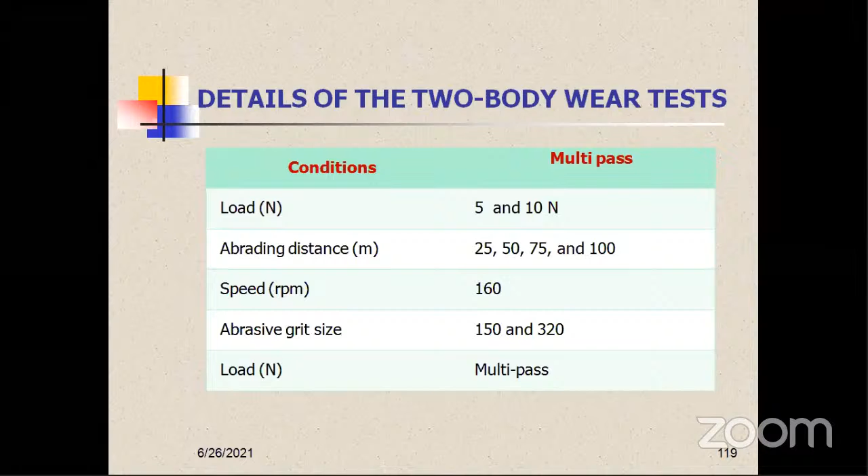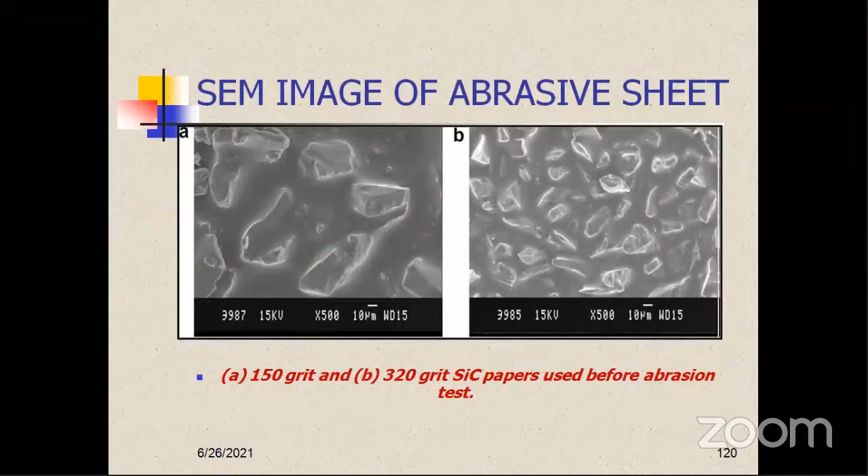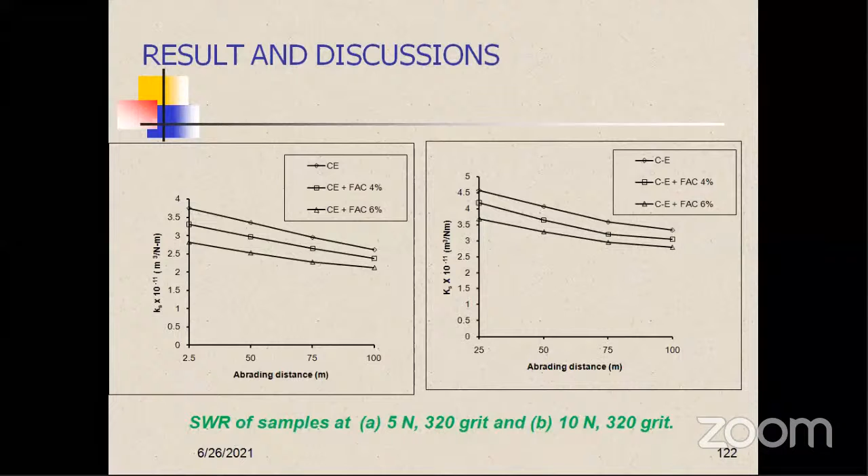And we studied the pin on disc wear test, two-body wear in multi-pass condition. These are the multi-pass condition abrasive papers with silicon carbide grit, 150 grit and 320 grit, used for evaluation of specific wear rate as well as coefficient of friction for the fly ash cenosphere carbon epoxy composites. And these are the results. You can see specific wear rate decreases with the abrading distance for different grit. As the grit size increases, the specific wear rate decreases. That is what we can infer from these two graphs. And at higher load, the specific wear rate versus abrading distance is also given for the composites we studied.

So as I said, why? What is the reason? You can attribute it better in the results and discussion of any good quality journal paper by making use of scanning electron micrographs of the worn surfaces at different test conditions, like with increasing velocity, increasing abrading distance, increasing load. For the material system you took, you can compare what mechanisms are involved, how material is removed, which parameter affects the higher or lower wear rate. Those things you can effectively discuss making use of these additional photographs from the scanning electron microscope. So these are all the conclusions related to this. Anyhow, because of time, I will not go through.

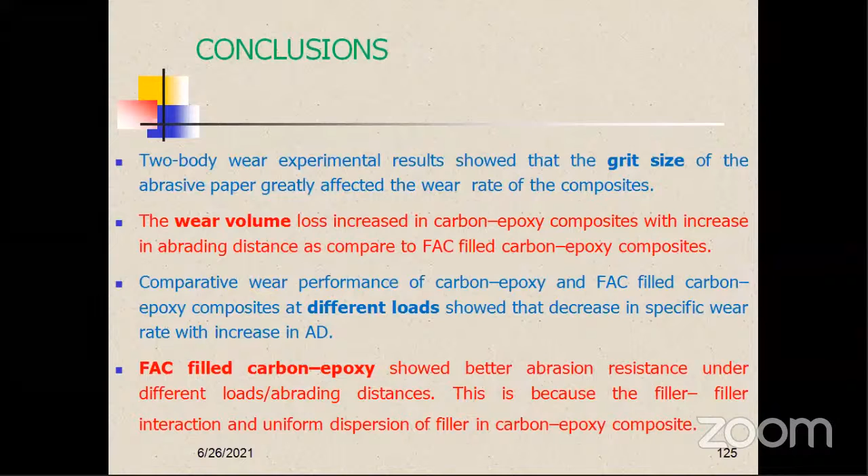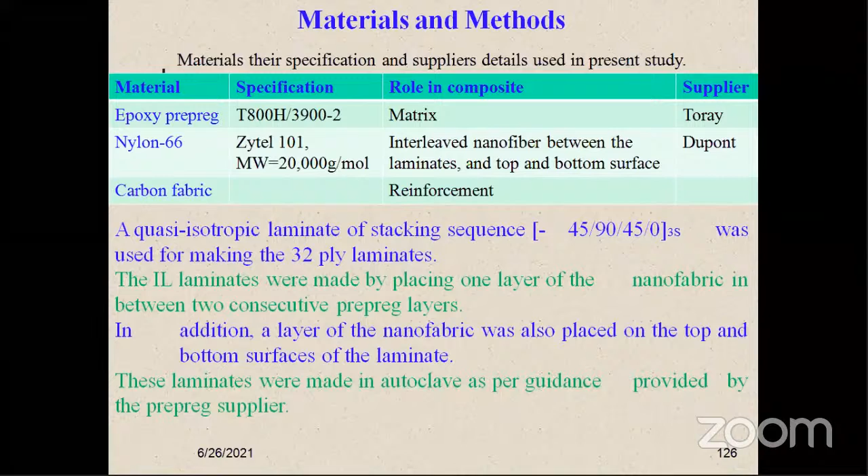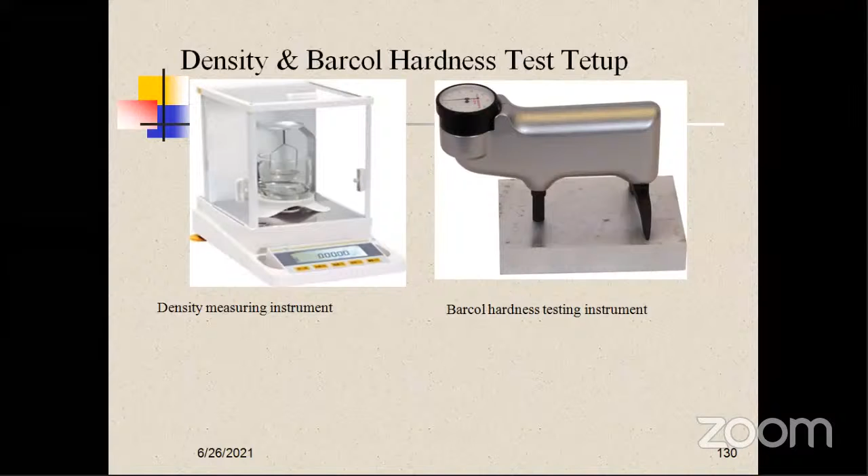And as I said, joint work from North Carolina University. This is the work on carbon epoxy with nylon as the interleave, with nano level layers taken for the study. This is how the composites were fabricated and tests were conducted. This is the single pass condition wear test we studied for these materials. These facilities are available to know the density, and for exact weight loss measurement we have a 0.1 milligram accuracy weighing machine with density measuring kit. For hardness, for the majority of thermoset or thermoplastic polymer composites, you can think of either Barcol hardness or Shore hardness. This is the three-body abrasive wear tester as per ASTM G65 standard, various parameters are accounted here, and these are the results and finally conclusions.

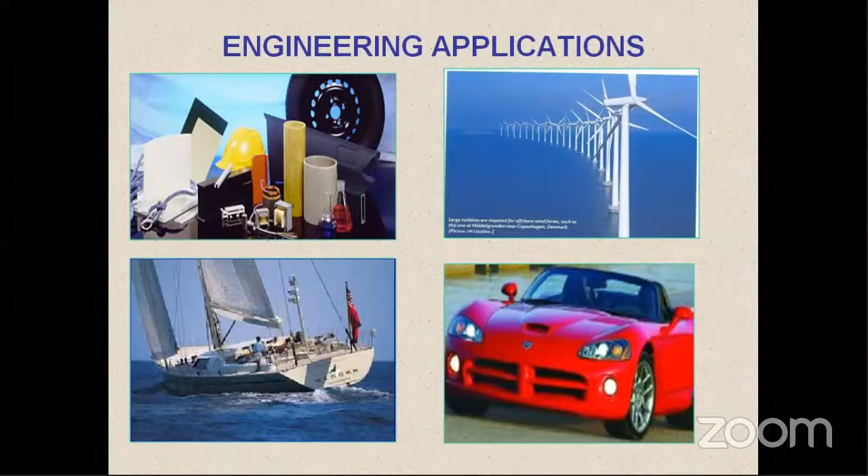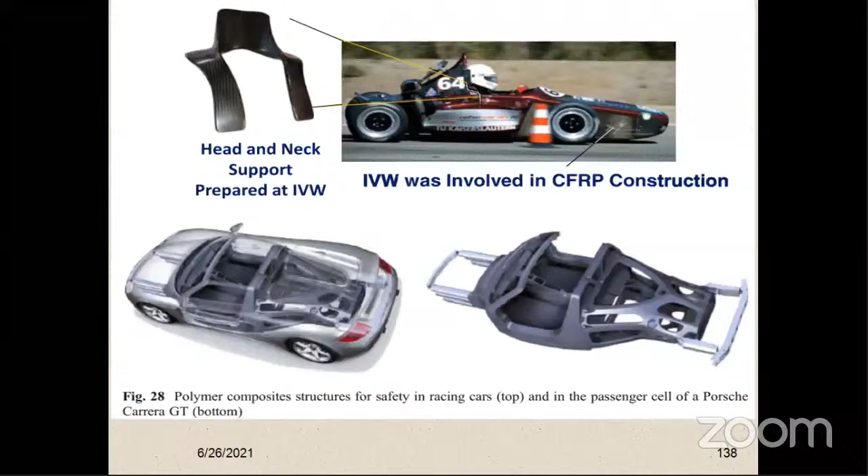So coming to the applications of engineering composites, you can see them in aerospace, shipbuilding industry, electronic industry, automotive industry, power sector, and various parts where natural fiber reinforced composites are used. In the electronic industry, PCBs, printed circuit boards, then in structural or interior decoration, etc. And these are our selected recent papers in journals I have given for your reference.

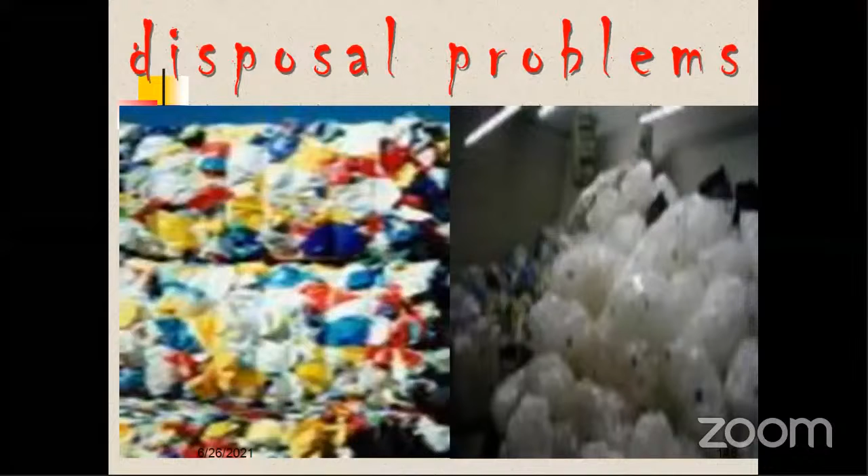And finally, I will say, make use of these, especially synthetic polymers, cautiously, wherever it is necessary. Otherwise, disposal is a major problem. Nowadays we have biopolymers. So make use of those polymers and meet the environmental restrictions so that pollution can be controlled.